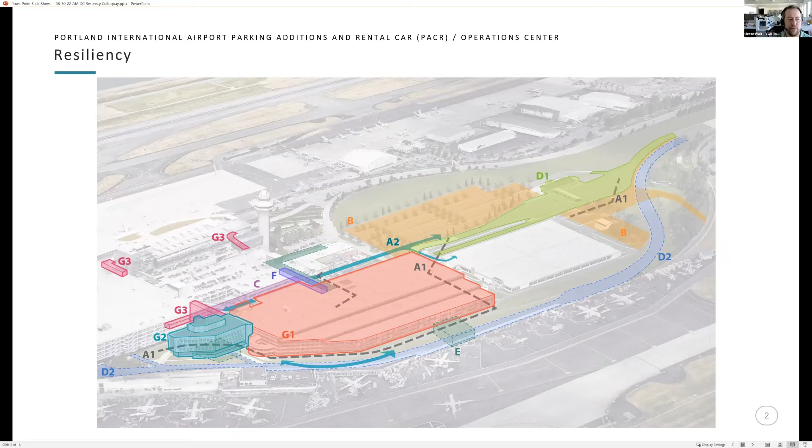It's a challenging site also in that it sits just a few feet above the water level of the Columbia River in a high seismic zone in Portland. So we're concerned about a very large earthquake and the silty soils that this sits on being saturated with water and basically sinking. So the strategy for this project to create a resilient structure was to put a bunch of large piles down to bedrock underground and create a series of grade beams with a mat slab structurally, and then build the building on top of it.

So it is designed for a large-scale earthquake event. In such an event, Portland International Airport is designated as an emergency recovery facility federally, so it would be where Red Cross, National Guard, et cetera, would land everything and stage. So this is a very critical structure in that recovery planning, I guess.

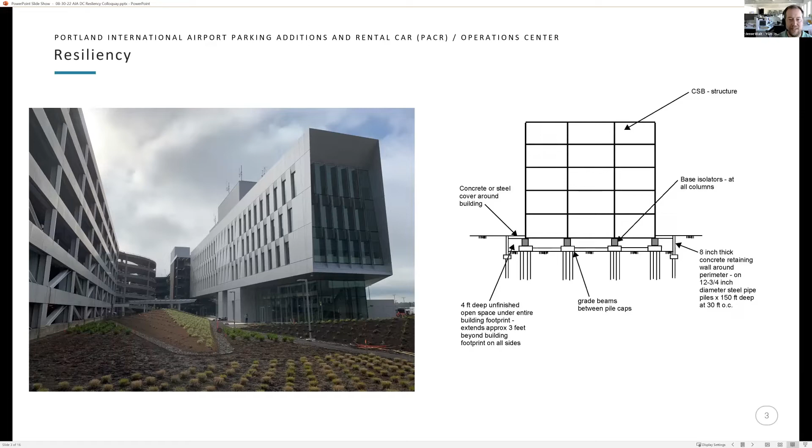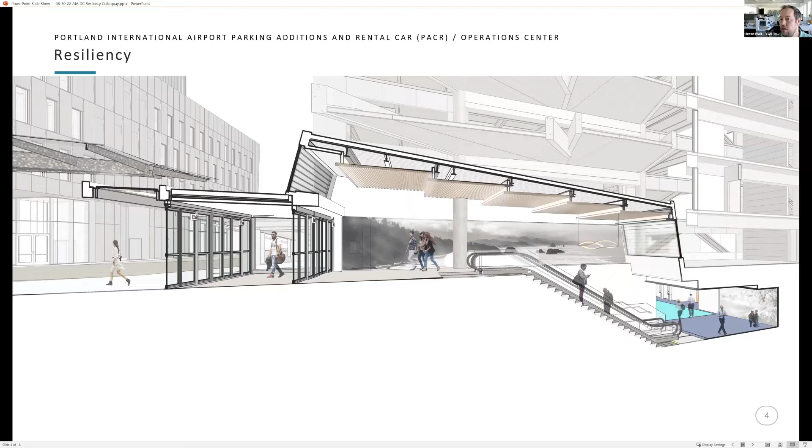So the second project we're looking at is the Marine Studies Institute on the Oregon coast for Oregon State University. Here's the site. This is Yaquina Bay, so it's a bay that's open to the ocean along a river. You can see the ocean out here. It's an existing campus that is in a tsunami inundation zone, also in a high seismic area. The purpose of the campus is to study the ocean, and so it's very important for them to be located near the ocean. They have their own dock down here for their study vessels.

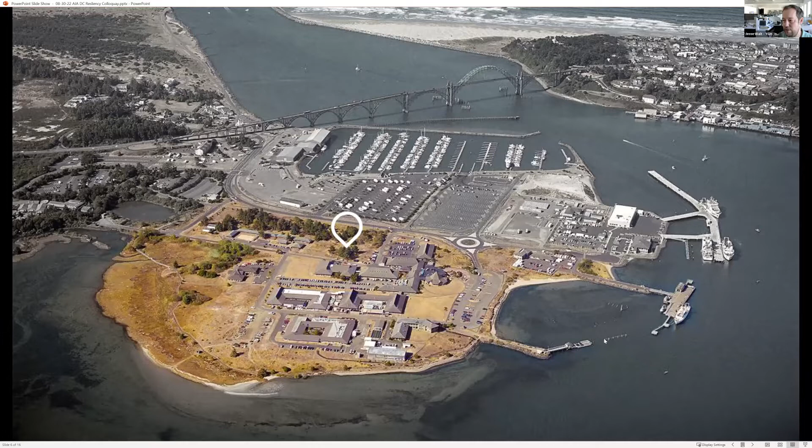So for this one, it was identified very early in the project that this was going to be an example project for how to successfully build a resilient facility on the coast in a tsunami zone that could provide a safe haven for evacuation of the campus. So there was a lot of public debate about whether or not that was the right approach, and we engaged in those conversations. There was a certain segment of the campus population that thought we should be building outside of the tsunami zone, that was a better resilient strategy to just not have to deal with it at all.

But because the existing campus is down in the tsunami zone, it was important to provide a commitment both to that campus and to the safety of the people down there. So what we were concerned about here was a 9.0 earthquake and then the following tsunami that would come in. So we did extensive tsunami modeling that was very site specific.

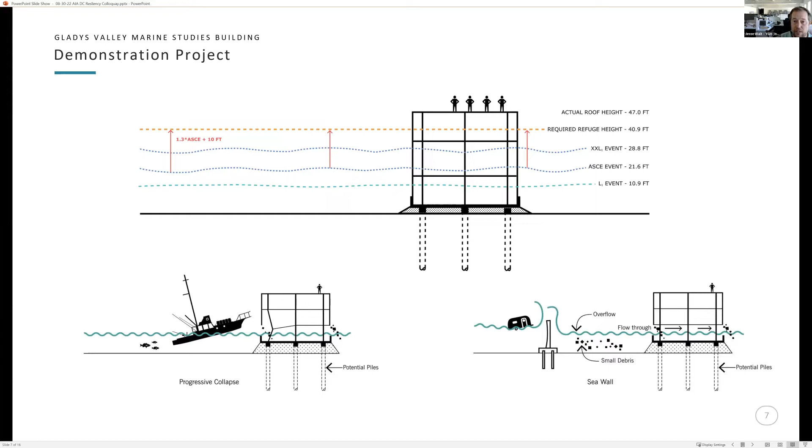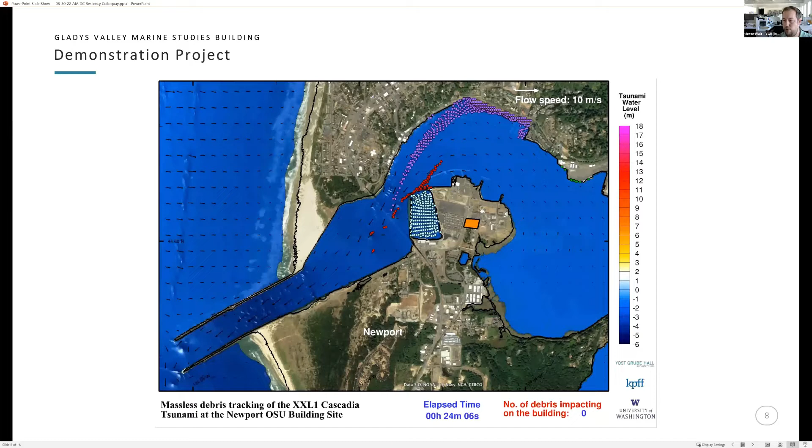I'm gonna play a short video here showing the tsunami. Each one of these dots represents a boat, basically. So prior to the tsunami, the water moves out towards the ocean. And then you can see it pulling the boats out, and then eventually it's going to push everything back in. And so we were modeling the amount of debris impact we would potentially get at the building site during an event. This modeling was done in conjunction with some specialists at the University of Washington.

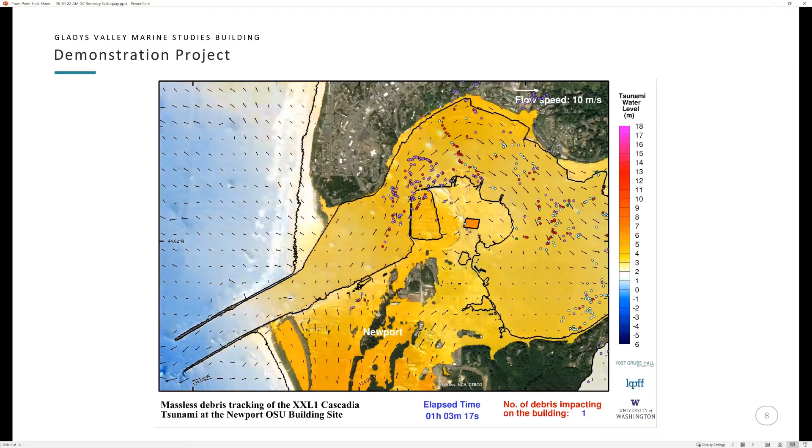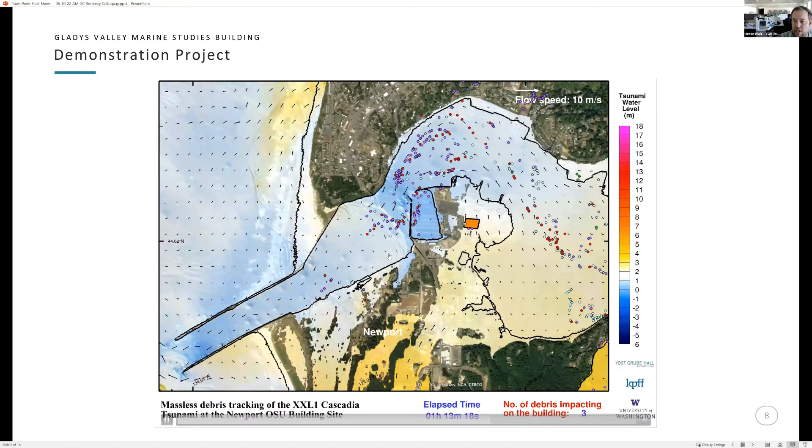So the important lesson from this is that it's incredibly site specific. If we had located the building elsewhere on the site, we would have had different potential impacts. And so really taking in that high level of site specificity paid big dividends for this project.

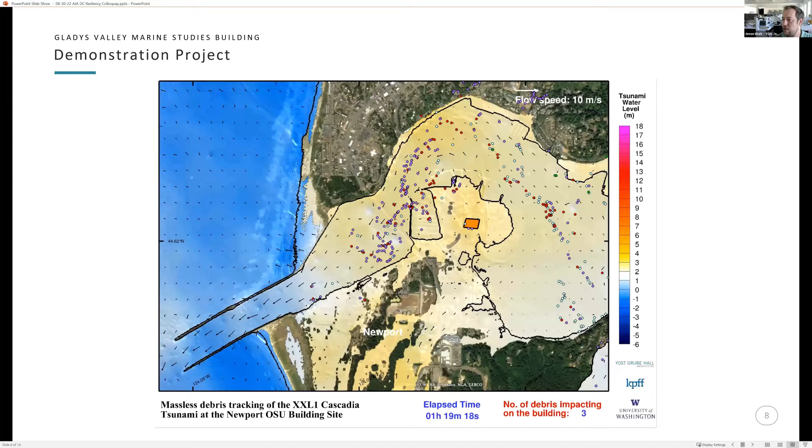So the strategies for this project were to look at different intuitive ways to evacuate after an earthquake out of the tsunami zone. We utilized special settings on the elevator to allow them to operate after a 9.0 earthquake to evacuate people up the building rather than the typical evacuation pattern of bringing people down to the ground level.

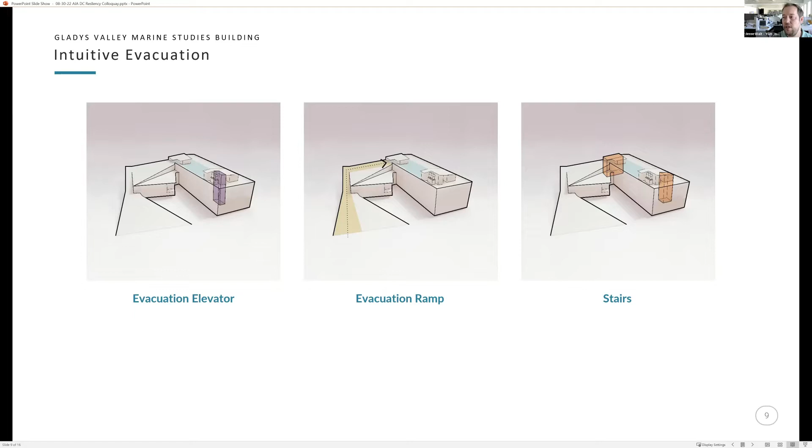We also put in the visual cue of an evacuation ramp that's visible from a lot of places on campus. So in addition to signage and emergency lighting that lead you here, it's also a great sort of orientation piece for the campus to know where to go should something be happening. And then there's also stairs as another way to evacuate up.

And then this is the final product. So here's the evacuation ramp up the building into a safe haven, which has food stores and other things for an emergency event. The ultimate strategy, because of the large scale earthquake and then following tsunami, is that the ground floor materials are intended to be sacrificial in an event.

There was no way to protect it from a large scale tsunami without basically barricading the site in large berms. So this is intended to wash out and then still be able to utilize the lab space and other spaces within the building relatively quickly after an event.

The last project is the U.S. Embassy campus in Mozambique. This campus is located right across the street from the Indian Ocean. What's unique about this is that the Department of State has a stated goal of all of their embassy campus buildings having a 100-year life span.

So early on in this project, we needed to account for things like anticipated global sea rise, climate change, other things like that. So a lot of strategies were developed early on to attempt to mitigate some of those concerns. And even this was originally done in 2013, and looking at what we were tracking for global sea rise at that point versus where we're at now, we were off by a bit. It's accelerated faster than we were expecting, unfortunately.

So one of the ways that we mitigated the noticeable added elevation to the site, because we did raise it 4 feet above the existing grade, which was at street level, was through this duned landscape, which helps sort of blur the fact that you're increasing elevation. You can really see this in some of these sections here with some of the security measures, where the grade where the buildings are sitting is actually quite a bit above the street level, but we've blurred that line with the dunes, so it's not really perceivable.

And then the finished product. So I realize I got through that fairly quickly. A lot of what we see when we're looking at resilient design is that the challenges are very specific to each site, and so are the solutions. And there's a lot of tools that we all have in our tool belts for coming up with these solutions.

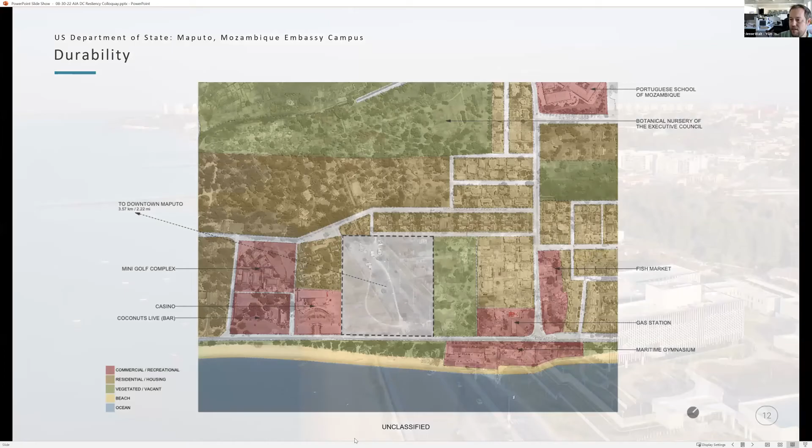I mean, there's certainly tried and true structural methods. It's a little more inventive when we're looking at tsunamis. If we go back to this building, about twice the mass of this building is concrete underground to anchor it in place, which required quite a bit of structural design work. But this building wouldn't work if it was located on another site near the ocean. Similarly, the embassy in Maputo wouldn't work if it was on another site. It's very site-specific solutions.

Can I ask a question? Yeah, absolutely. What is the ratio of length for the understructure, the structure below grade, to the structure above? Is it like a cantilever length, or a lot shorter than that? It's shorter than that, based on the distance that they needed to go to get to solid bearing. So it's not a cantilever, it's roughly the height of the building. And it's about twice the mass. Twice, I got you. Okay.

Thank you so much, Jesse, for the presentation. I feel like this is the first time I'm seeing a design that's addressing a tsunami situation. Is that common? Is this one of the first projects? This is one of the very first ones. We did a lot of research on this project. The very first ones we found were in Japan, addressing their tsunamis.

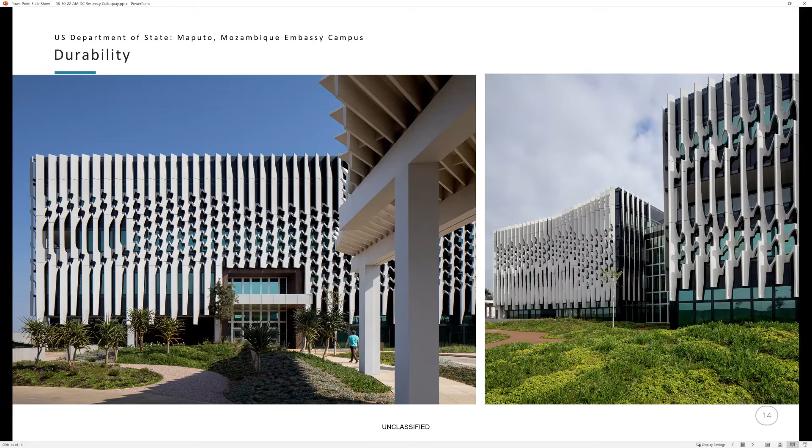And so when we're designing for these worst case scenarios, it has experiential trade-offs, not just financial ones. And so how do we somehow factor that in, but allow it to change over time or ramp up as needed? I don't know. As opposed to just all of a sudden raising everything a whole floor.

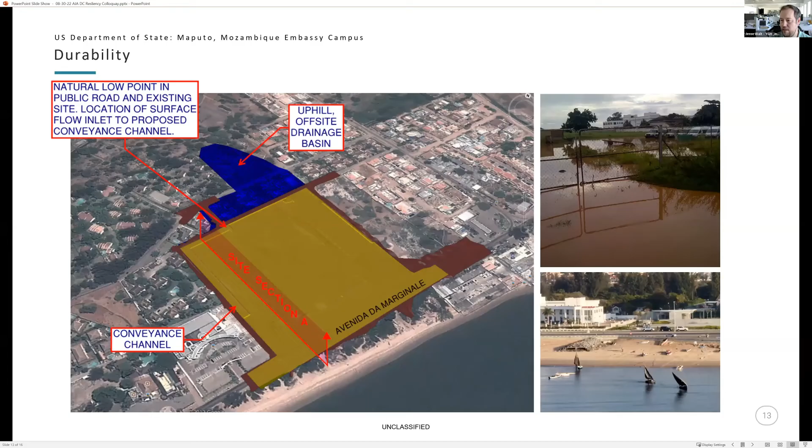Yeah, I mean, I think both in the case of the embassy project and this marine studies building on the coast, we tried to take the resiliency measures and both mitigate them visually, but also where appropriate, celebrate them. There are things that they allow you to do that are design decisions you wouldn't necessarily otherwise make.

So in this example, this first floor is sacrificial. So it's made from lighter looking material. It's a more transparent floor. If you were to look at this building and guess what would happen if a tsunami came in, you would understand that this is going away. But this big solid block above it is sturdy and going to stay. Yeah, that's fascinating. So it starts to inform the design language in that way.

Great, thank you so much. These are all really gorgeous projects with a lot of analysis going into them. I'm wondering, have they spawned other projects nearby to sort of follow suit?

Well, in the case of the embassy project, no, because it's the State Department project and we're working in a third world country. So while it spawned a lot of development nearby, they haven't really followed suit in terms of resilient projects. This particular project here that we're looking at on the coast has spawned other discussions and projects up and down the coast of Oregon that are in the planning stages right now. We're actually peer reviewing another evacuation structure in Washington as one of our current projects right now.

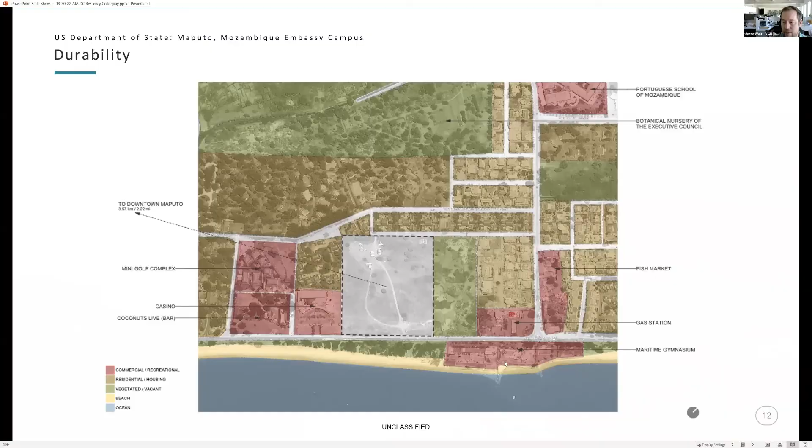One quick question. The materials that are sacrificial, what are they? Sure. It's largely glass. Just the glazing? It's glazing, so it's a curtain wall system and a metal panel system with metal stud wall. What kind of metal? Like aluminum? Yeah, it's an aluminum cladding. Any of the dark facade would be sacrificial? None of the dark facade is sacrificial. Even in a maximum event tsunami, it will not impact this dark facade. And what is that material? That's shou sugi ban. Okay. Thank you. Yeah.